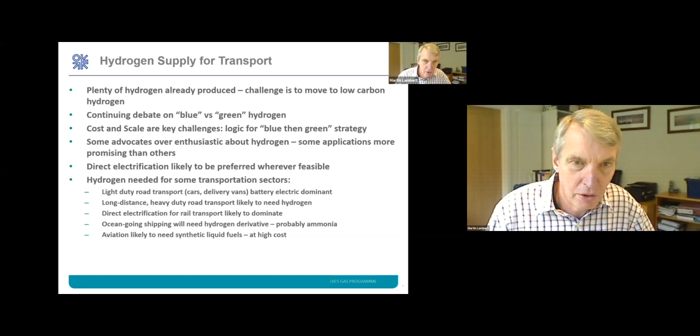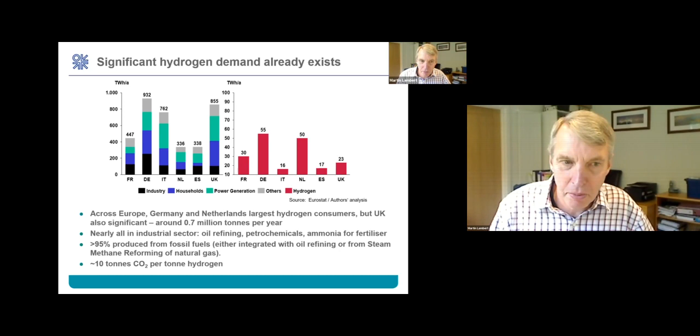So these next few slides are just a very brief look at hydrogen production technology. This may be familiar to many of you, but I thought I'd run through it quickly, not least because there's some interesting terminology. People talk about grey hydrogen quite a lot, which is how it's produced today. In some parts of the world, hydrogen is made from coal or from oil, but the vast majority is made from natural gas through a process called methane reforming, and that produces hydrogen.

But the important point for this slide is that for every ton of hydrogen you get 10 tons of carbon dioxide emitted. So for that UK number, 0.7 million tons a year of hydrogen in the UK produces 7 million tons of carbon dioxide.

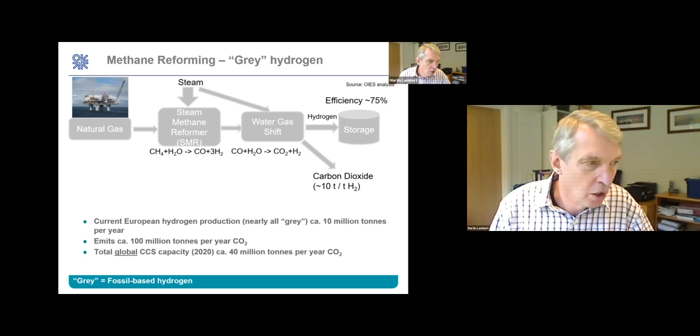People talk a lot about blue hydrogen, particularly in the UK. So blue hydrogen is just all of that same process as before, but you capture the carbon dioxide and then pipe it somewhere, typically offshore, put it in a disused gas field or other underground structure geologically and store the CO2, and that turns it into blue hydrogen.

As a technical aside, for methane reforming there are two different technologies, and most hydrogen today is from the steam methane process. The subtly different autothermal reforming process actually produces more concentrated CO2, and so is better if you want to capture the CO2. So that's grey hydrogen and blue hydrogen.

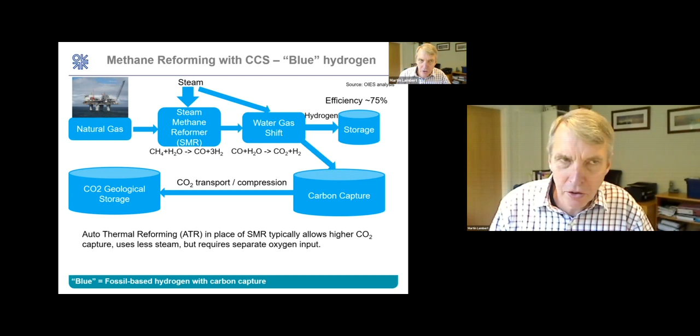But what many policymakers, particularly in Europe, but I think also in the UK, see as the long-term holy grail is green hydrogen, which is also talked about in the context of sector integration. There's a few clicks here, I can explain what's going on. The idea is that hydrogen is made by splitting water into hydrogen and oxygen through a process called electrolysis, which has been around for well over 100 years, so nothing particularly new there.

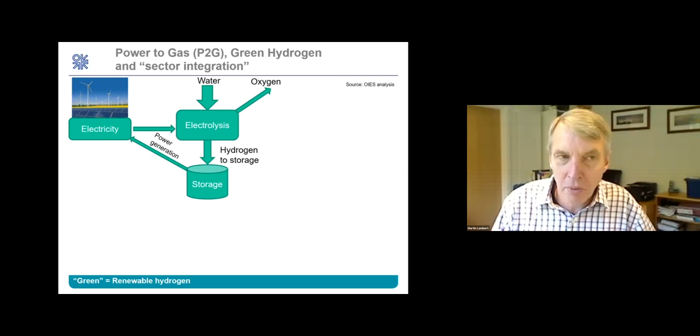What is new is producing it from renewable electricity, which means it's effectively zero carbon hydrogen. In the case of carbon capture and storage, there's still probably about 10% of the CO2 not captured, and that's why green hydrogen is preferred. But it's also liked because once you've made the hydrogen, you can store it and use it for industry or for transport. Nice hydrogen bus there in my picture. Or you can blend it into the gas grid, which is a fairly easy way to dispose of the hydrogen when you first make it.

And then longer term, you can perhaps use the hydrogen to combine with some carbon dioxide, preferably from a biogas plant, so biogenic carbon dioxide, to make methane, and then you've got a synthetic methane which can go into the grid. So that's why green hydrogen is seen as really interesting, because it integrates the electricity network with the gas network and can bring together the energy system in a reasonably new and innovative way.

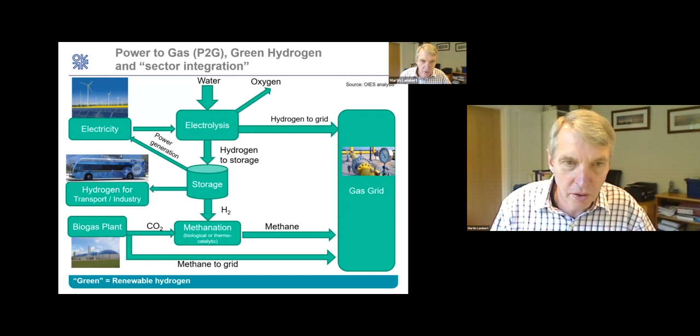Right, so that was the background on what green and blue mean. I said at the start that cost and scale are the big challenges, and this is an illustration of the way in which cost is a substantial challenge. On this slide, starting from the bottom up, you can see that blue hydrogen is only a relatively small premium over grey hydrogen. Adding carbon capture and storage clearly has a cost, but in the right locations, like the east coast of the UK, not a huge additional cost. And so the cost of hydrogen does go up a bit.

This chart makes assumptions about carbon pricing increasing. As carbon prices increase, you can see that the cost of blue hydrogen is then equivalent to grey hydrogen, effectively saying that once carbon prices are above 80 euros a tonne or thereabouts, blue hydrogen is probably economically preferable to grey hydrogen.

On the other hand, green hydrogen currently is really very expensive, because of a combination of the price of renewable power and the price of electrolyzers. The kit used to make hydrogen is made largely at very small scale currently, and therefore it's quite expensive. It's projected to come down in the future, as the graph shows, but that will require quite a lot of things to go right for renewable power to come down in price, and for the price of electrolyzers to fall. And that means building large-scale green hydrogen plants so as to get up the learning curve to bring those costs down.

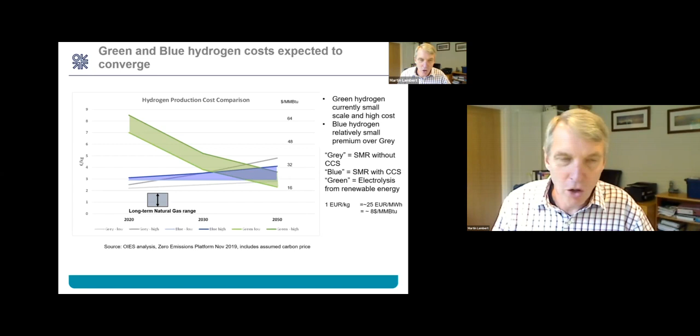And that means effectively there's more work that renewable power has to do to lower the carbon intensity of power generation. So if you divert lots of renewable power for making green hydrogen, then it's arguable whether it's very green at all, because you could have used the electrons to decarbonize the power grid. So implicitly, you're making your hydrogen from fossil fuels by a rather expensive indirect route.

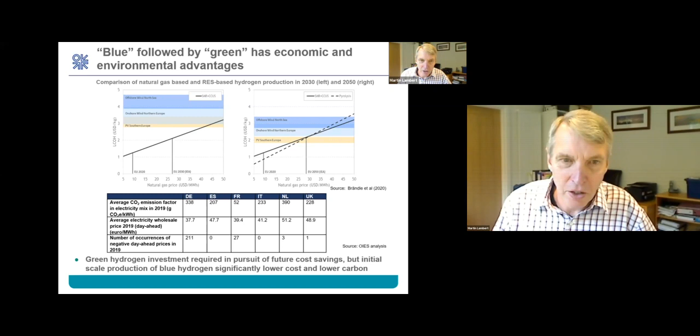This chart then zooms in a bit on the UK. And the UK is actually one of the few countries in Europe where the blue, then green hydrogen argument has been understood and bought into by policymakers. So the UK actually is putting quite a lot of focus on blue hydrogen.

The top left-hand chart is from the National Grid future energy scenarios. So UK National Grid produce scenarios each year. And what you can see is there's quite a wide range of expectations of production of blue and green hydrogen by the time you get out to 2050. And that will depend on policy, which way you get there.

We're talking about transport today, so I think it's important to note that out of all the uses of hydrogen envisaged in scenarios, somewhere between 20 and 50 terawatt hours of hydrogen is for transport. So it's part of the picture, but not necessarily a huge part of the picture. That just puts it in context, but we're talking about supply today, and that's where supply would come from, so a mix of blue and green.

Also, hot off the press news in the last week or so is that the UK government has been talking for some time about supporting 2 carbon capture and storage projects initially, and then 2 more after that. And it's recently been announced that the so-called North East England cluster around Humberside and Teesside, that's one of the priority projects. And the other one is on Merseyside, the HyNet project.

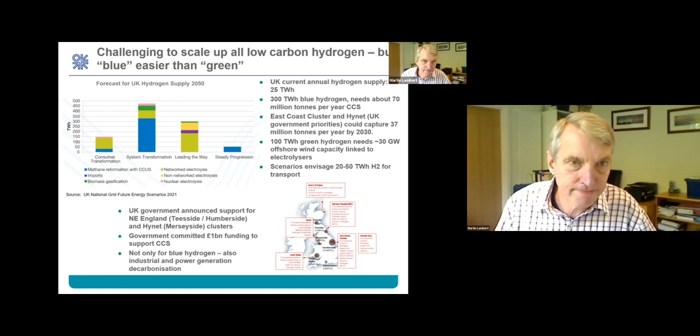If I zoom out from the UK a bit and look at the wider Europe picture, so Europe, most countries, apart from perhaps UK, Netherlands, Norway, are almost entirely focused on green hydrogen. And green hydrogen very much has a scale challenge because the current biggest electrolyzer in operation in Europe is 10 megawatts at Shell's refinery in Germany. They've just announced they're expanding it to 100 megawatts.

But in order to get to any significant amount of green hydrogen production, you need gigawatt scale production. And there's a couple of projects being talked about now at gigawatt scale, but they're still quite a long way from even starting construction. So the scale-up challenge, particularly for green hydrogen, cannot be underestimated.

So if I move on now to look at application of hydrogen, so where we see hydrogen really having a major role in the future and where it seems less likely. And so I talked at the start about existing hydrogen production. And so we see the first priority really is to decarbonize that hydrogen, either by carbon capture and storage or by adding green hydrogen instead. And making ammonia is a particular priority because ammonia, as we'll see, has quite an important role in the transition.

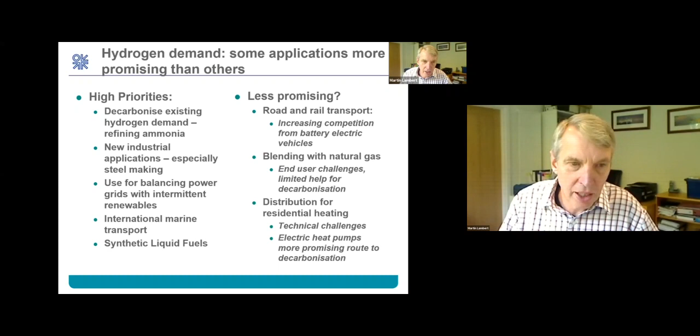Blending in gas grids is a useful way to dispose of hydrogen in the short term, but isn't really a long-term way to decarbonize the system. And also, again, hot off the press, the UK government has announced its heat and building strategy, and that confirms what I say there. Electric heat pumps are way more efficient than hydrogen boilers, and so therefore that's probably going to be the preferred route wherever possible for decarbonising heat in buildings.

Just to explain a bit about why hydrogen is only limited for light-duty transport. The top left chart on this slide tells the story quite well, because if you think of a long-term world where green hydrogen is the answer, then you'll be starting from electricity. If you then put it into an electrolyzer to make hydrogen, and then put it into a fuel cell to make effectively electricity again to then power your car,

on the left-hand side of the left-hand chart, you can see the big loss in efficiency, and so the electrical input that you need to get to the electrical power that you want. Conversely, on the right-hand side of that chart, if you just use a battery, there are some losses, but they're relatively small. And that is a good reason why, for those sort of applications, it makes sense to use batteries.

Also, there's a critical mass story. So top right, I put in a nice picture of the Toyota Mirai, which is a fairly expensive vehicle to buy. And currently in the UK, there's only 11 fueling stations to fill it up. So people talk about the problem of charging electric cars, but at least there's a lot more options for that than there are for hydrogen.

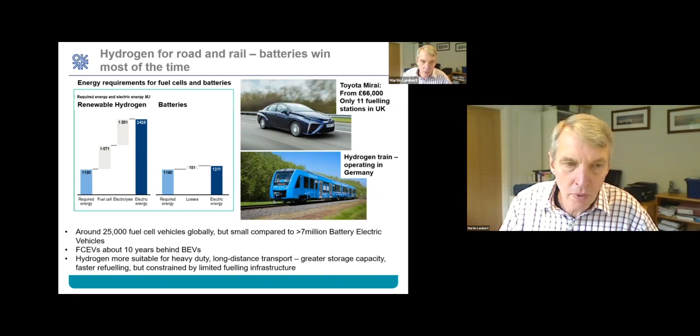Coming towards the end now, this is the story around shipping. So the International Maritime Organization had a big campaign up to 2020 to take sulfur out of marine fuel oil, and that was quite successful. The next target is to decarbonize shipping, and the options for that are fairly limited. So my story about electrification where possible applies to ferries, for example. That has been done, particularly in Scandinavia, quite a lot of electric ferries operating.

But for long-haul shipping, there are relatively few alternatives. And making ammonia from hydrogen seems to be probably the most promising alternative at this stage. In the table at the bottom left, I've got a bit of comparison with other options. All of them, of course, are pretty expensive compared to the current oil alternatives. But if you want to decarbonize, we can't carry on using oil. And so out of the options available, ammonia is probably the most suitable for shipping.

But that chart's also helpful because thinking about aviation, another hard to decarbonize transport sector, you might also need to have synthetic liquid fuels. The price of all those, you're looking at 3 to 4 times the current price of the fossil-derived product.

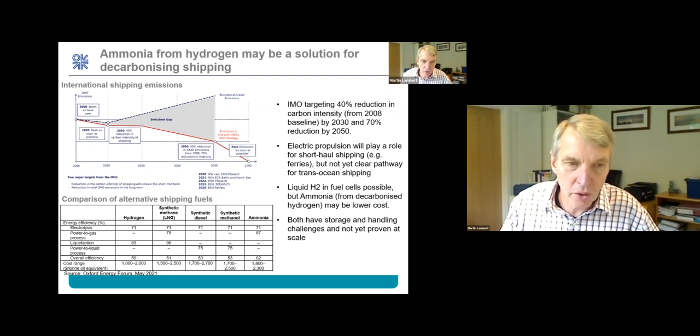And then just a final word. So these tables came from a publication we put out in May this year called the Oxford Energy Forum. It's a quarterly magazine. You can find it on our website, and that had lots of articles from different authors about the role of hydrogen in various applications in various countries around the world. So if you want to have a further read, I can recommend having a look at that.